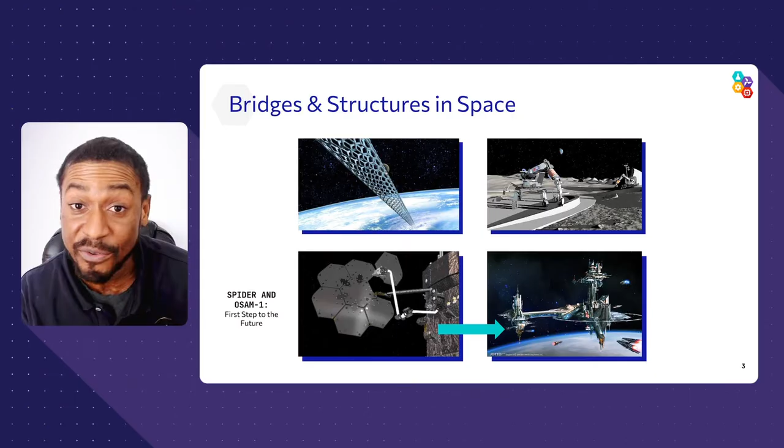You're probably wondering, hey Milton, you're an aerospace engineer, you're a space guy, what do you care about bridges? Well, I'm interested in developing bridges that span space. Is there a way to use bridges and structures to launch the next satellite or next astronaut into space? Is there a way that we can develop bridges and structures on the moon? Maybe you are going to be the next astronaut that lives on the moon or on Mars. Maybe we're building structures and bridges for the next live community, almost like a world that orbits around the Earth, right? Bridges are important because bridges make connections, and I want to connect us in space.

Okay, so this lab is going to be a lot of fun. Let's give a little bit of history about bridges. Let's talk about bridges a little bit and talk about why they're important.

First, bridges are important because they provide safe passage. If you know the history of human beings on this earth, it's been very difficult for us to travel across our different continents and go across these very difficult and dangerous regions. And bridges are able to span a lot of different obstacles.

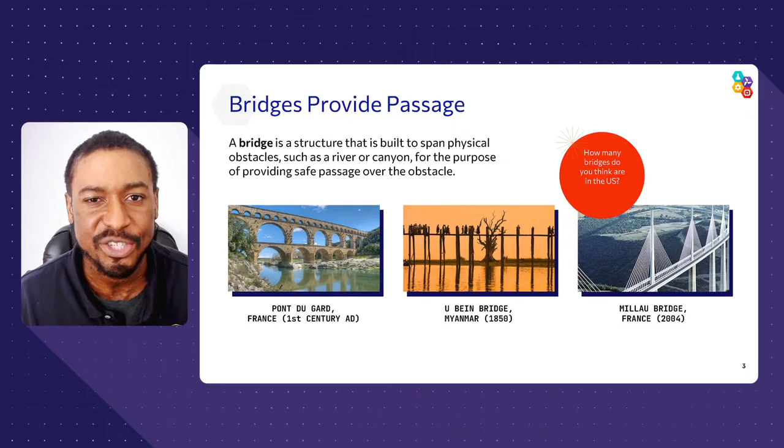You know, they actually say that you can tell how resourceful a country is or a state is, or the strength of their economy, just by the number of bridges they have, right? So how many bridges do you think we have in the United States? Answer that for me. How many bridges do you think there are in the United States alone?

Well, if you guessed 617,000, you were right. 617,000 bridges that allow us in our country to be able to perform a lot of different tasks, for these businesses to operate, for us to secure our country, for you to be able to travel and see some of the most beautiful locations we have here in the United States.

That tells you a lot about the importance of bridges, not just here in the United States, but across the world. Did you know that there are countries out there, regions that don't have access to clean water or to medical practices or to different businesses and business opportunities just because of their isolation?

Bridges build connections. And this is one of the reasons why a friend of mine, I could call her a friend now, Avery Bang, developed this program to develop bridges all across the world for people who would not have had the opportunity to be exposed to clean water, to be exposed to things like the internet, right? It's just crazy. I mean, her whole business is a nonprofit to give them those opportunities.

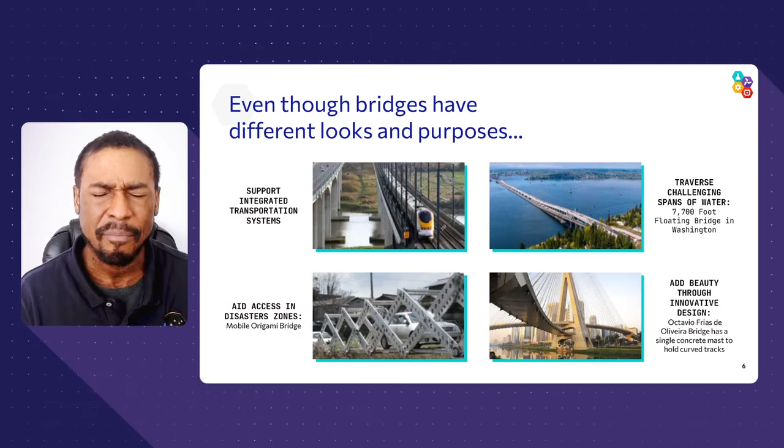Just like you, you're in school, you're probably balancing difficulties with social media, you got all your homework, maybe some chores. All that can feel like stress. The more stress you have in your body, the more force, it can also feel like pressure and strain. And if you get too much strain, you start to feel like you're going to break.

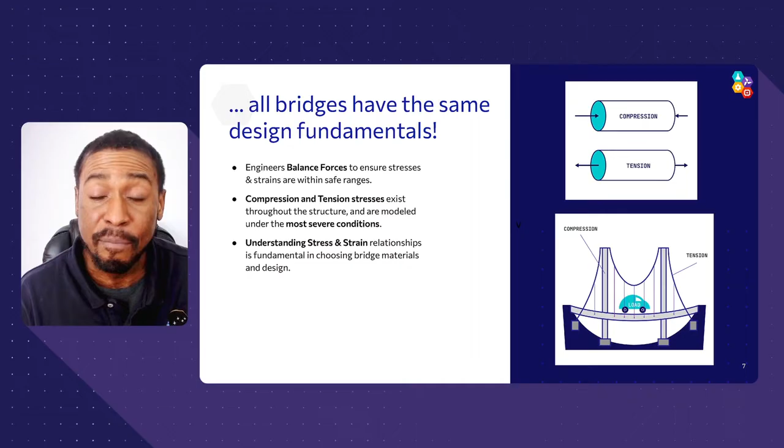The same thing happens with a bridge. There's some tension, that pulling motion. There's compression, that pushing force, and force over a certain area is defined as pressure. The more pressure applied to a bridge, the more it strains. Strain is that deformation - how much it bends, how much it displaces over a given region. And if there's too much strain, it could permanently break, permanent deformation.

We don't want that to happen. So as an engineer developing this bridge, you have to think: how do I balance all these different forces? Not just compression and tension, but even bending, shear, and buckling. How do I balance all of that to make sure it doesn't strain too much?

Because people are going to be transporting across these bridges, critical assets like people. We want to make sure the bridge withstands the greatest possible force we can anticipate, mitigating the risk to people's lives for sure.

So that's our bridges, and you can develop those bridges in a lot of different ways. There's a lot of different design options, and we'll talk about this later. Shape matters. Architects and engineers use things like beams, suspension, trusses, and cantilevers to develop a bridge that spans a given region while maximizing the strength to support the most weight needed for whatever has to transport across that bridge.

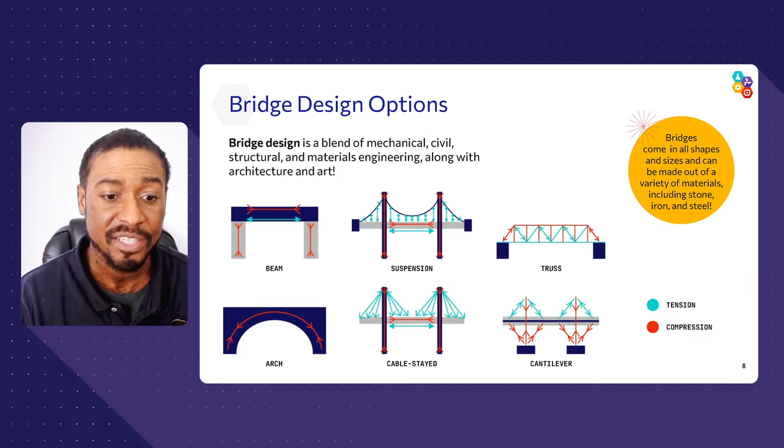That's what's important. There's different engineers involved here - architectural engineers, mechanical engineers, structural engineers - all come together with civil engineers and even artists, because bridges are sometimes some of the most beautiful structures you can see, all coming together for the goal of developing a bridge that balances all those different forces.

It makes you wonder, who thought of this? I just think it's really, really cool. There's a problem out there and someone engineers it.

It always made me wonder, in the history of bridges, did someone thousands of years ago, maybe even longer, standing in some forest, coming to some lake, notice: man, this tree fell and it fell across this lake. And now I am able to walk across this obstacle that would have been dangerous for me to walk across. I always wonder, was that the first bridge?

So we have these bridges that kind of look like trees. And then I think engineers started to get really creative and realize we have access to other materials - concrete, stone. Now we can compile these different materials together like a composite and make a bridge that has more endurance and more strength to support more weight.

And then I wonder if they started to really realize, wait a second, we're using all these heavy materials like stone and brick - what if we used a metal? A metal has even greater strength for its size and weight, so we don't have to use as many materials if we become a little smarter with the type of material we use.

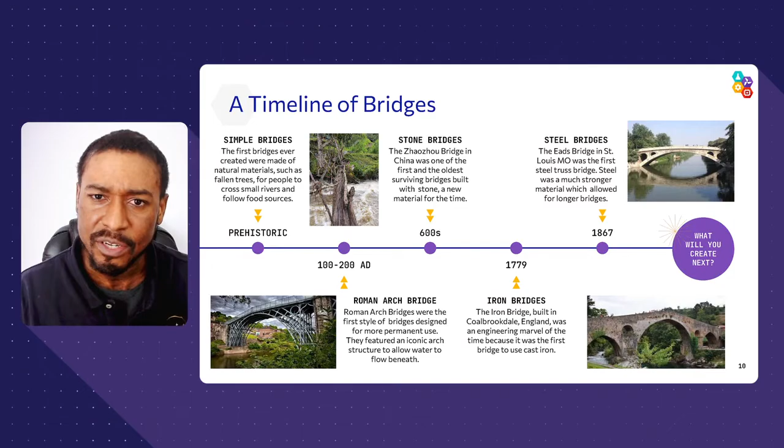And then I wonder if they combined all those together and said, what if we use really great materials like metals, but also use them with the strongest shapes like arches and trusses to develop these bridges. So as we always ask, the next question is: what are you going to create? What's the next bridge, the next smart idea, the next smart material, the next smart shape you can use to develop a bridge optimized for an even greater span, an even more challenging obstacle?

Well, let's start here. Let's start with your challenge today. You're going to build a bridge, maybe as an individual, maybe as a team, that is going to span about 12 inches and support the most weight that you can while balancing all of those different forces.

And we're going to give you a cheat code. That cheat code is the engineering design process. The engineering design process allows you to start intelligently with this design, where you think first, let me do a little research.

Let's learn about this problem. Your problem is, well, how do you support a bridge, design a bridge that can support the most possible weight? And then you start with your actual design.

We're going to ask that you take out a sheet of paper and really draw it out, because the better your design, the better your build. You'll spend less time rebuilding your bridge if you really think about it first as a team and develop a good design.

And then what we ask that you do is don't be afraid to fail, and fail fast. After you build it, test it, and keep testing it over and over again. I personally have been blessed to obtain a couple patents, and all of my patents were obtained from my failures. None of them came from anything that was easy.

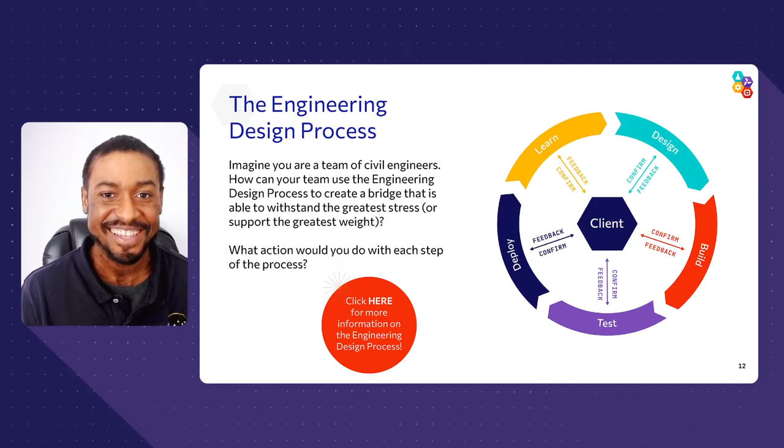All right, let's do an activity real quick. So before we jump into developing this bridge, let's practice on something simple like some paper. So here's our challenge: I'm going to ask that you take out 2 sheets of paper, maximum 2 sheets of printer paper. What you're going to do is use those 2 sheets of paper to go across a span of about 11 inches.

You'll set up some blocks or something to support your bridge that is about 11 inches apart, no more than 12. And then with the bridge, from a size standpoint, let's keep the width of the bridge to about 3 inches. All of these are your constraints. This makes the competition fair.

Okay, so now I want you to try to support this: an entire cell phone with just 2 sheets of paper. I'll give you a couple minutes and then we'll talk about it.

Okay, so how did it work out? Did it work? Who was able to get their bridge to support an entire cell phone? Well, let me show you this, and then we'll talk a little bit about what's important. Let me show you my setup. So I have a couple of wood blocks that are going to support my bridge.

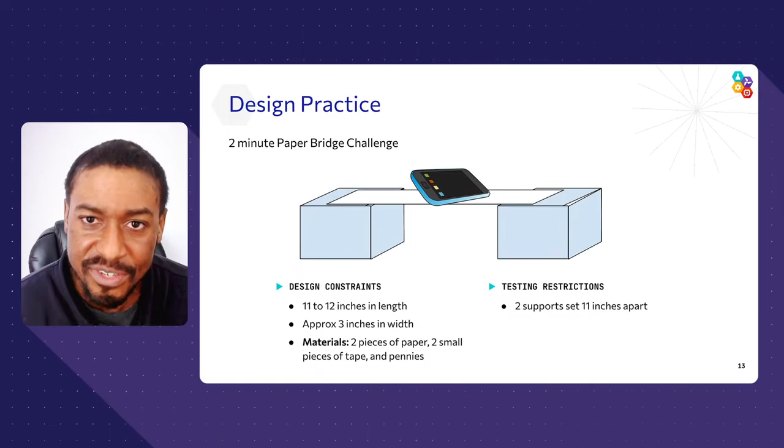If I can't do anything about the length, if I have to span a really long obstacle, man, L cubed, that is going to drive the response up way high. The only thing that I really have to play with is the materials that I'm going to use and the shape.

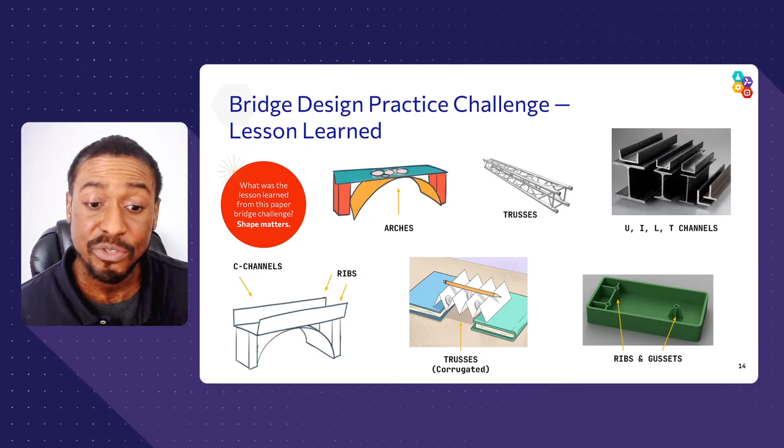You got it? So I think we talked about shapes. We talked about materials. You had a history of bridges. Let's dive right in to your challenge. Here's that challenge. You are going to develop this bridge to span about 12 inches and support the most weight that you can. You'll start by doing a little research first, right?

You always want to research the materials, research bridges other folks have worked on, come up with some ideas before you design your solution. And as always, again, before you build it, really come up with a good design on paper. That's going to make your actual build much better. And then, like we talked about again before, don't be afraid to fail and fail fast. We've given you enough materials where you could build this bridge a few different times. Then after you're done, analyze the results, see how well you've done and continue to optimize.

All right. So here's your challenge. And what you see on this page is a couple constraints. Now, the reason we have some constraints is because it makes it fair, right? It would be totally unfair if somebody could spend a boatload of money and use something like titanium on their bridge and support 3,000 pounds. So we've given you materials that you're restricted with regards to what we've given you, simple materials, hopefully recyclable materials. And we're also saying that the bridge has to span 12 inches.

That's a constraint on length, right? We're also saying that the bridge should be 3 inches wide or less, because we don't want it to be too wide or too tall. And we don't want it to have to be too short—the shorter it is, the easier it's going to be for you to support the weight.

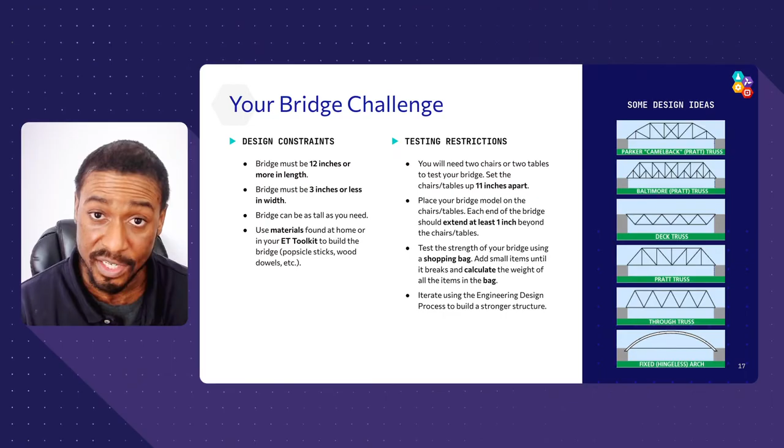Now you're probably wondering why constraints. Yes, it makes the challenge fair, but all engineers have to deal with constraints. If you're going to make a product that somebody actually buys, it can't be too expensive, so cost is a constraint. It has to have the right time to market—if you wait 5 years, maybe nobody wants it anymore, or somebody else has already invented it. So time matters. And it has to have a certain level of performance. If you're developing a bridge, it's got to support the weight of humans and anything transporting across it reliably, even in weather, so it has to have a certain strength to endure those different environments. That's why constraints are important.

So you have all your restrictions, you have your constraints. Let me show you an example of how to set up the test—that's what we're going to see in this next page. In this video, we're going to show you an example of how to support your cans or your weights, how to use some of the hooks that we gave you to support your bridge across a certain span.